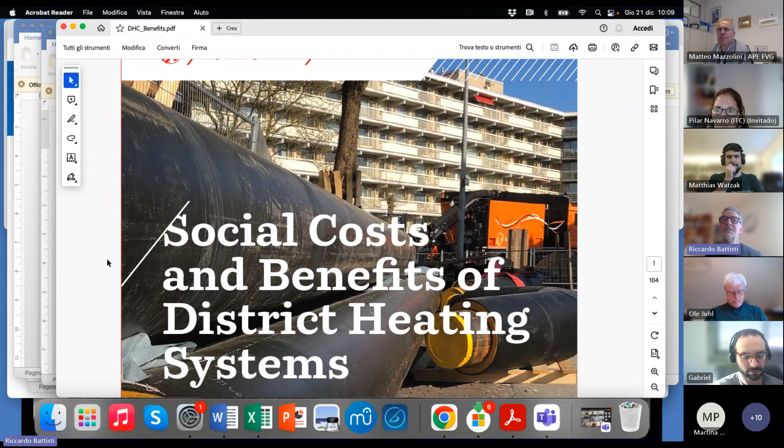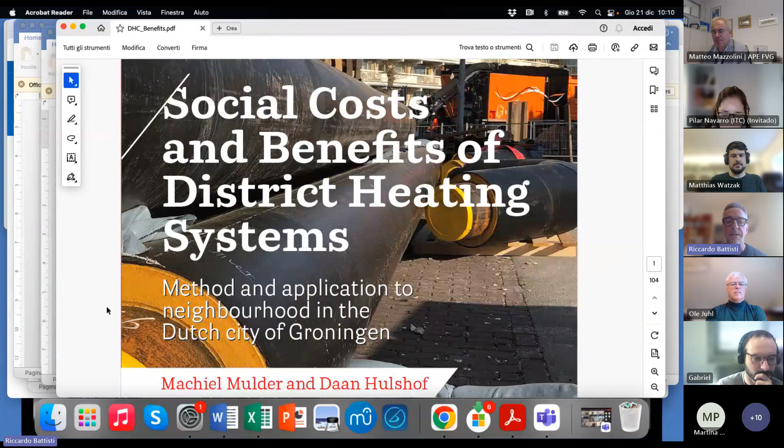Another interesting point is that this is from the Netherlands, where they have several district heating systems. We will hear from Ole especially about the experiences from Denmark, so I think this is very interesting - it can be complementary to what Ole will say. It's an application to the city of Groningen, where they installed a district heating system, basically with heat pumps. But we also present a general method on how to assess all of these elements.

So we just have a look at the table of contents, just to give you an overview. As you see, here they have different scenarios to assess the social cost-benefit analysis of this district heating system in particular, and more in general with the methodology. So of course, they define different scenarios of possible implementation of the district heating system, and then you have the different economic effects.

So first of all, of course, on the users, so on the households, then more in general for the whole district heating system. Then, as I was saying before, there is also an estimation of the indirect economic effects - for example, what is happening on the electricity network because of the introduction of this district heating system. Same for gas production and transport, or for other infrastructure.

And then, of course, this is maybe the most interesting chapter for our topic today - the external effects, so the external costs, let's say. So what are the environmental effects and what is their cost? Once again, everything is quantified in this study.

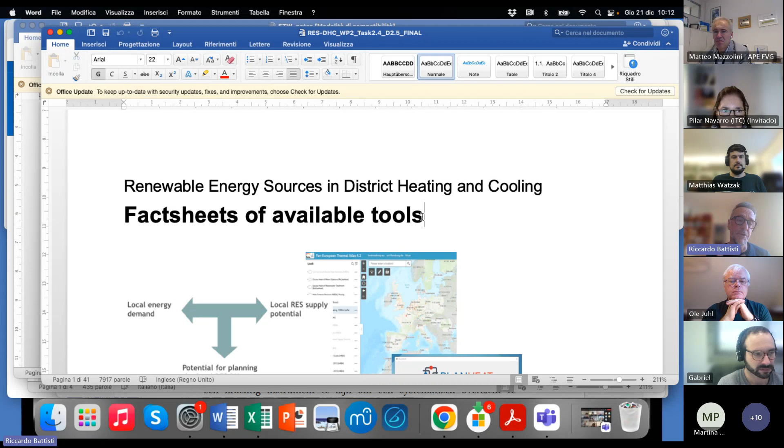Another thing I wanted to show you is something we developed within another European project on renewable district heating, called RES-DHC. We developed within this project a collection of fact sheets of available tools for estimating, for example, the potential of renewable district heating. Within this document, with the fact sheets of available tools, I want to show you here - you have a list of tools. We collected 15 different tools, which are all free tools, so these are not tools for purchase.

But then in the end, one of the appendices of this document is how to evaluate RES-DHC policies. And why I want to show you this is because here we tried to - it's the start of the work, not 100% detailed, but we tried really to start developing a comprehensive methodology to assess the benefits of developing, for example, district heating in a community. So we explain why you have to measure the results of your policy, and you can have a look and a read at the whole methodology.

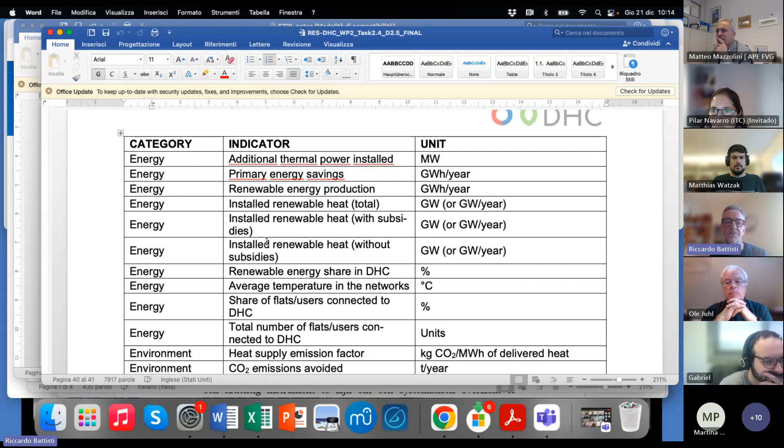You see that we define different steps, but what I wanted to highlight today is step 3 - which are the indicators you use to assess the benefits of the district heating, because this is today's topic for our train the trainers. So we started to develop a list of potential indicators here. You see that we have several possible indicators on the energy benefits of installing district heating systems, a series of indicators regarding the environment, and also about the economic and social effects on the community.

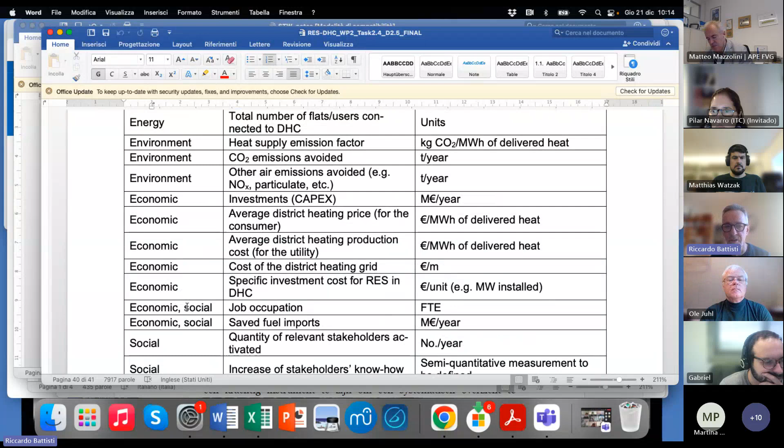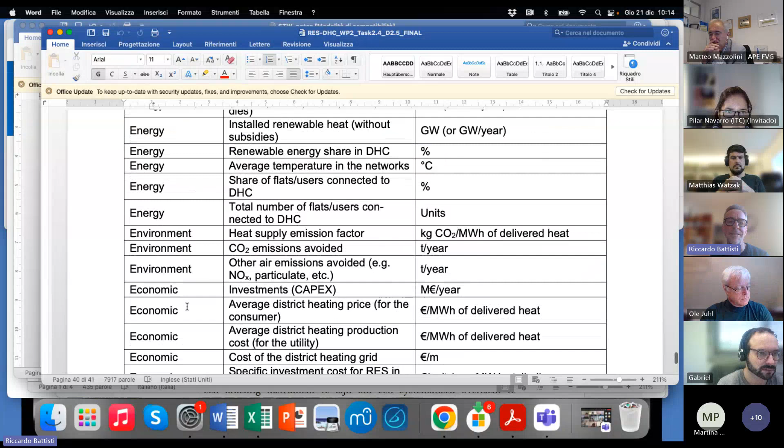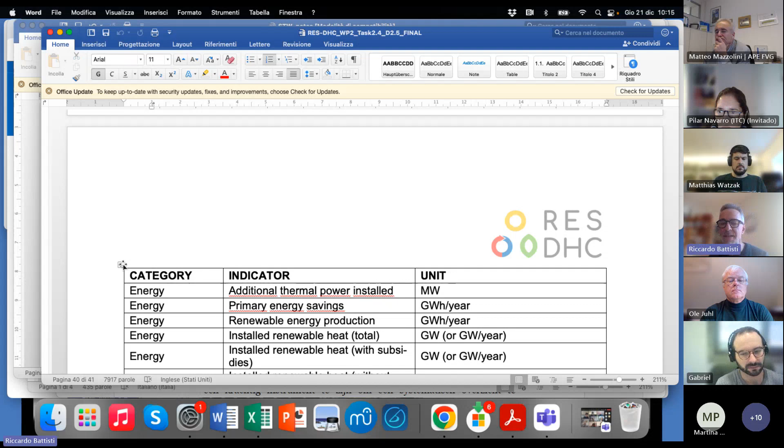So I think it could be also very interesting to have a look at these indicators, because this is not meant to be a list of mandatory indicators. It's not that each case should use all of these indicators to evaluate the benefits of a district heating community or a heating community. But here you can pick some of the indicators which fit best with your case. So I think this is also very interesting.

And I would close here, and I will send you these two documents, because I think this can be an inspiration also for your work on the pilot cases. Thanks.

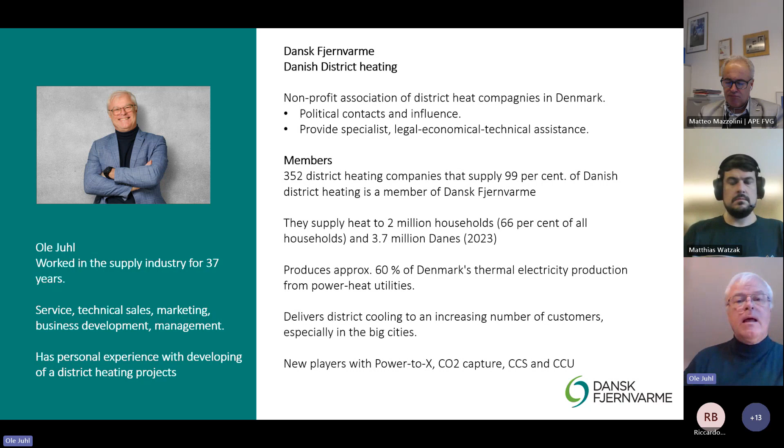In Denmark, the status is we have a little bit more than 3 million households. 2 million households use district heating. The rest are using natural gas, oil, electricity, wooden pellets, heat pumps, that kind of energy supply that we are moving away from, especially fossil fuels like gas and oil, but also the biomass from wooden pellets we are moving away from. But we have a transition period for the biomass because it's a very big change for many companies that have to change into perhaps electricity, heat pumps, or something like that.

In Denmark, as I said, there are close to 400 district heating plants, and the main part of them are cooperative, non-profit organizations. I think in Denmark we only have 40 that are not cooperative. They are owned by the municipality. It's not allowed in Denmark to own it as a private company. You're not allowed to earn money or own a district heating company. It's all about non-profits. I'll come back a little later to why that is.

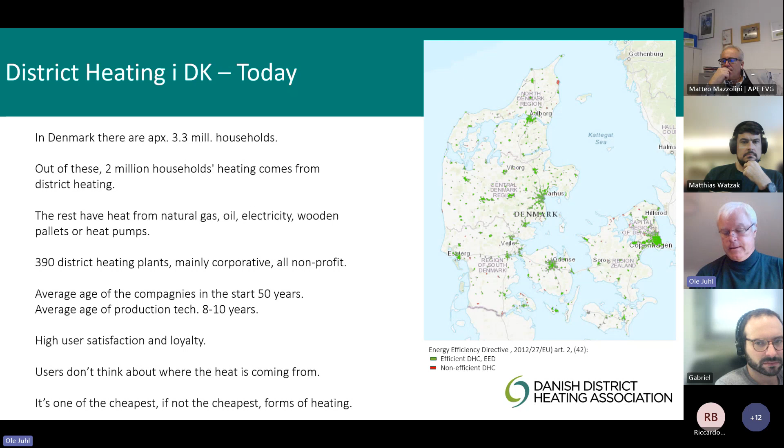So it's actually having a lot of place in our heart and in our society. There's nothing that comes from itself, and the background for this is that the precondition before the 70s was that we had an energy crisis that hit very hard. Those of us who are old enough can remember when the gas prices increased, here in Denmark we had days without driving, it was not allowed to drive your car. You had to walk. It was Saturdays, so we enjoyed it very much actually. And many people saw it as an opportunity to get a walk on the highway because it was dangerous to do before that.

But before that, we in Denmark have a strong cooperative movement. We have had cooperative ownership of the water sector since the middle of the 19th century. Agriculture sector also for many years, it was actually farmers in Denmark who got the idea about going together and building a dairy. And that has been a part of our way of thinking here up north. Electricity close to the year 1900, where we started making a cooperative electricity supply. And the first district heating company in Denmark opened in 1903, more than 100 years ago.

And also the movement includes football, we won the Euros in '92. So we like to do things together, and we think when we go together, we are very strong at it. It's easier to lift something when you are many people instead of one.

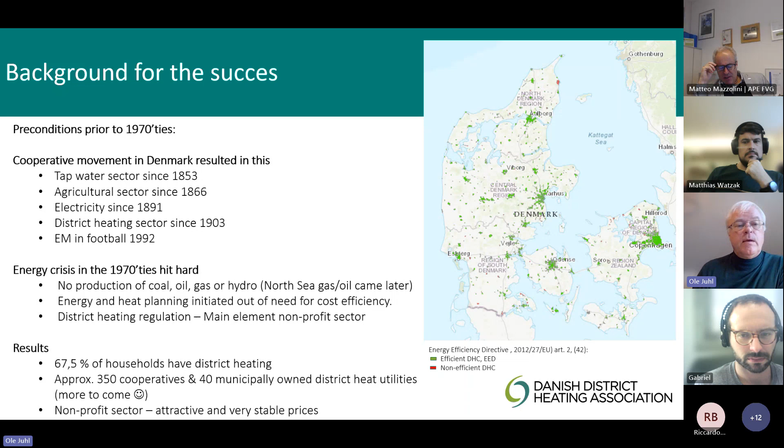Putting a little numbers and a few years to the history: in the 60s, growth on private and municipality initiative. In the 70s, we decided there should be a kind of legislation about it, a regulation saying how to do it. And also we thought we should have the first ideas about surplus heat, how should we use waste heat, so to say. At that time, we had a large production of electricity from plants in Denmark using cooling water just pumped into the sea.

And we could see there was no ice close to those electricity units and plants, and the fish were also much bigger there. So we actually decided this heat could be used for something, and we used it for district heating. In the end of the 70s, beginning of the 80s, we got the first regulation, we got the law, we got the planning from government, we got the planning from the authorities, and we started building up the networks, expanding the existing network, so they were not just in the big cities and the main cities, but also in many smaller villages, going down to 70 households as the smallest I have heard about.

When we came up to more present time in the 90s and the 2000s, we also saw that we could use much more different kinds of energy sources. Biomass, and we had natural gas coming up in the 90s. We were actually seeing that oil was a limited resource here in Denmark, so we shouldn't use it for making electricity or district heating. But we got a lot of gas, we got a lot of biomass, we could use that for something.

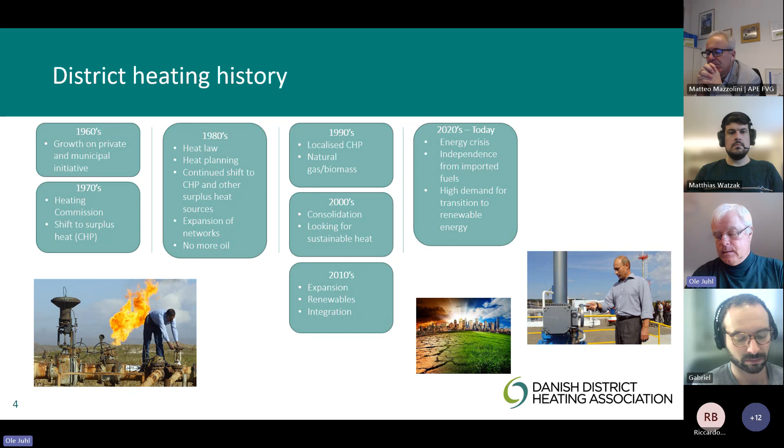Moving up to now, the 2020s, the energy crisis hit again. And when we have a crisis as humans, we also get creative and start thinking, how should we move away from imported fuels? How should we move away from fossil fuels? And how should we look into collecting carbon dioxide? That's the way we're looking at it now, saying how can we increase that movement that moves us away from the things that are environmentally and climate challenging, making the world a more green place to live. That is where we are now.

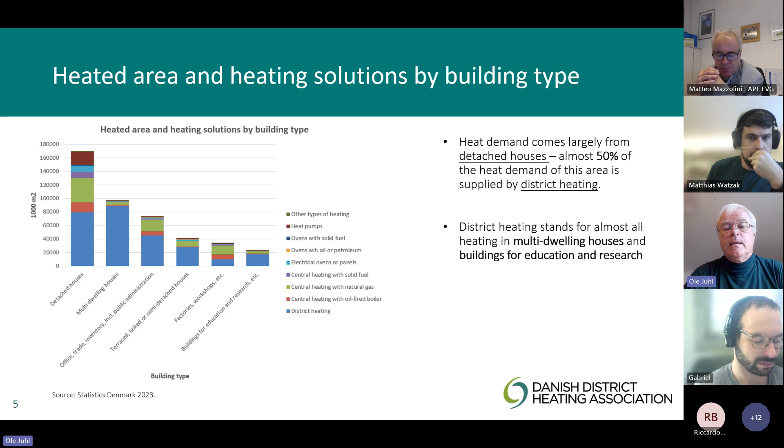And because we have here in Denmark a lot of detached houses, most of the heat demand comes from detached houses. But also we see that multi-dwelling houses and housing associations are very into getting district heating because it lifts some technical issues for them and provides them with very stable energy again.

We will lower our amount of natural gas and coal, taking it away where we like, but we are realistic in saying we will still need some natural gas for special productions that are very demanding, and also use it a little in some special areas that need it, as a backup heat supply. Solar heat a little, coal taken away, biogas taking over a little because there is a way of taking more carbon dioxide out of the business here.

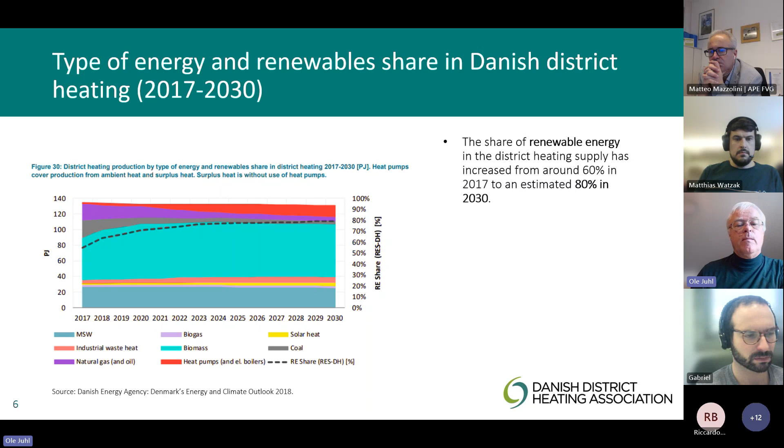So we are estimating that when we're coming around the 2030s, we will have a high level of renewable energy and probably will have moved away from burning anything to get heat.

The price is a very important thing for the consumers. Saying it's non-profit, yes, it is. There's nobody that earns money from providing people with district heating. But for the consumers, it's very important that the price is stable, but also attractive.

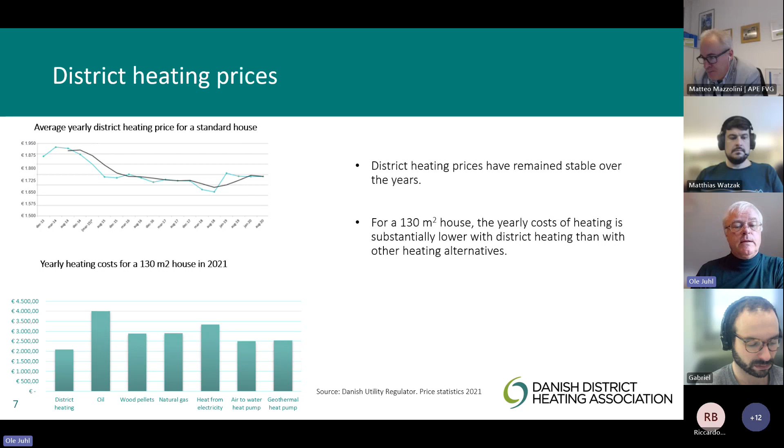But what is district heating basically? You know there's a lot of technology behind it—we have consumers, pipes, production plants. But in essence, district heating is actually a group of people going together and sharing the bill.

A lot of people go together and have a regulation that agrees to do so, and we just share the bill. It's the largest and second oldest sharing economy. Sharing economy in many things is a new invention, but in district heating we made it available in the beginning of the last century, so we share the bill.

We also have a high adaptability, a flexible production of heat. When the ball game changes, like now with natural gas and electricity going very high in the bill, we can change our heat production to something else, something cheaper or easier to get hold on. There's also supply security in the supply chain to consider.

When electricity production goes down, or as we saw earlier with wood chips when we couldn't get access to them, we can just change production to something else. That's why people don't see any problems—we have centralized production making it easier to change things, giving a more stable economy.

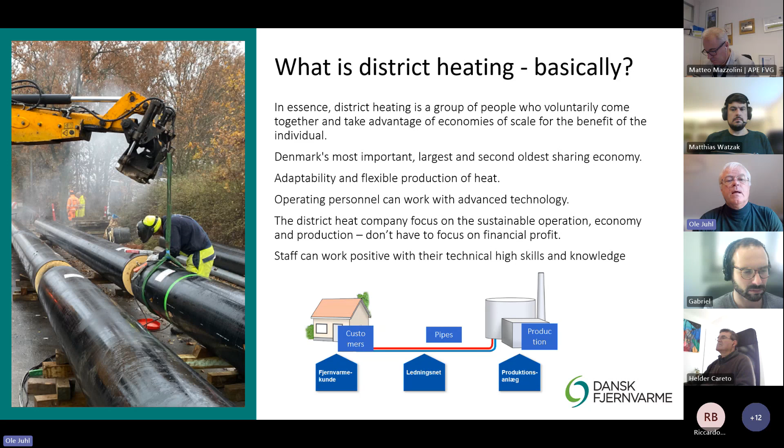District heating in our country is a kind of Swiss knife of energy—they have a lot of tools. They have the pipes, and the customers' technology is the same: a unit in the house, and pipes in the ground.

Updating there is not as high a need, because we are talking about a very long lifetime of the pipes, close to 70 or close to 100 years actually.

So all the development and the change are happening in the production areas. We have a lot of things to pull on: wood chip, heat pump, straw, waste heat, solar collectors, biogas, waste incineration, electricity boilers, natural gas, oil, coal, and geothermal. So we have a lot of different kinds of energy sources. The benefit is it's very easy to switch to a cheap or accessible energy and a more efficient technology. It's much easier to change the whole thing at one place instead of going to many households to make it more efficient.

That's also why it's very easy for us here in Denmark to look into the green transition, because we don't have to go to 2 million households to change from natural gas, coal, or oil. We just have to go to 400 plants to change for 2 million people, households. So that's some benefits - very efficient.

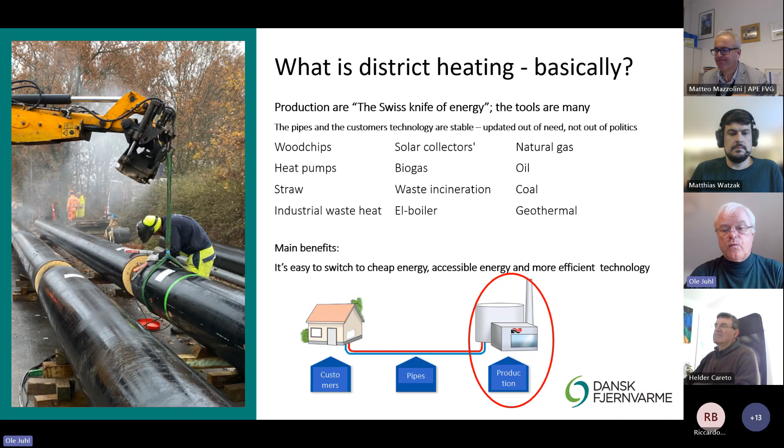Finally, the customers, who are also the owners - the drivers for them, and what do they get from it?

The users say they've got the most stable heating bill for many years to come. They're actually saying, when I build a house and I have chosen my district heating, I don't have to worry about changing the price level. It's very stable for many years, and it's very easy for me to make a budget for my private economy.

You have only a small unit indoors, not something as big as a 200-liter freezer or cooler. You have a small unit, 50 by 60 centimeters, that just prepares the hot water for you, and you have more space in your utility room or workshop, wherever you installed it.

It gets a lot of people to share the bill with. So if they are in need of a new pump or a new burner or whatsoever, you are not one person who should buy your own. There's a lot of people buying one together, and that makes it cheaper for everybody individually.

You become more independent of major political influence and conflicts, because if the politicians change something, we have a way to react to it. If they want to increase the taxes on biomass, then we can just move away from biomass and look into perhaps geothermal or other things that are very difficult to tax, because if you use geothermal there's no pollution, there's nothing to tax. It's very difficult for the politicians to do that.

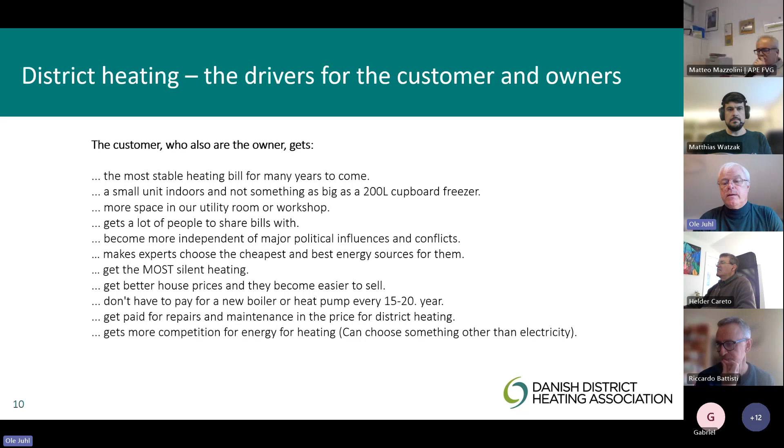Even though we have legislation and it's a non-profit area, we see more competition for energy heating. Instead of just having electricity or just having gas, we now have district heating and electricity in the area, so we can always change into something else. If I feel district heating is getting unattractive, I can change to electricity if I like, and the other way around.

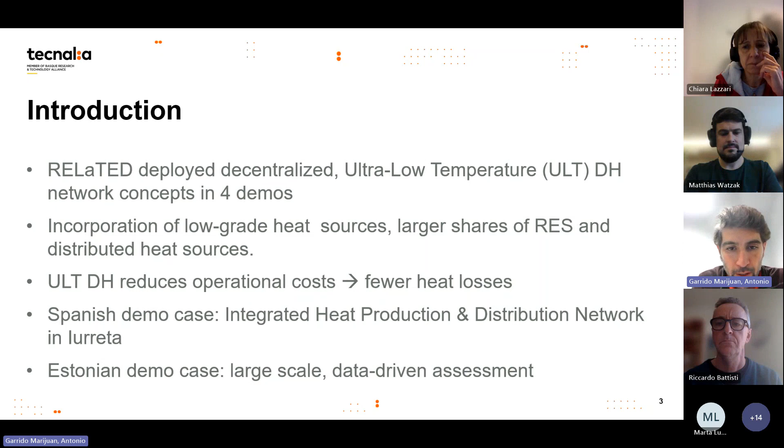There are two demo cases I want to present. The one in Spain was at the police complex, with 12 buildings attached to this district heating, so it's a small scale district heating, but it was really interesting because it was a mixed configuration.

It has dormitories, it has office facilities, gyms, and swimming pools. This means a lot of heat loads 24/7 around the year, because they never stop the operation as they are the police.

This was served by 2 boilers delivering heating and domestic hot water at the complex at 80 degrees. 80 degrees is a normal temperature for this kind of networks, but we tried to work at 35, in parallel to the pre-existing conventional district heating network. We worked at 35 of distribution.

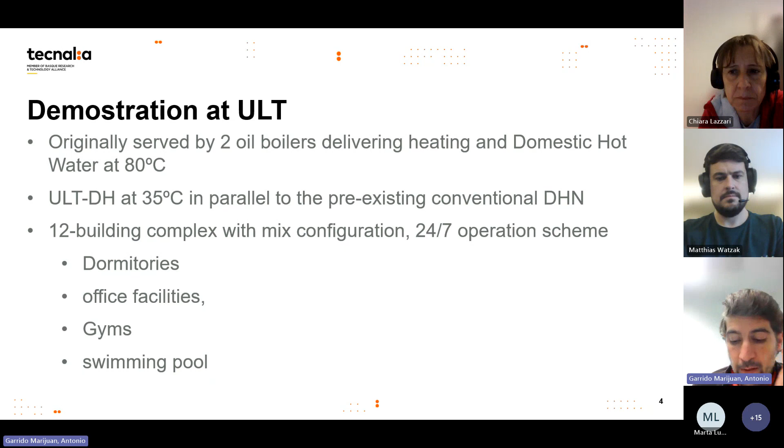This does not mean that we worked at 35 within the buildings, because they had all radiators, but we had some locally deployed heat pumps that were connected to the district heating. So this was really interesting.

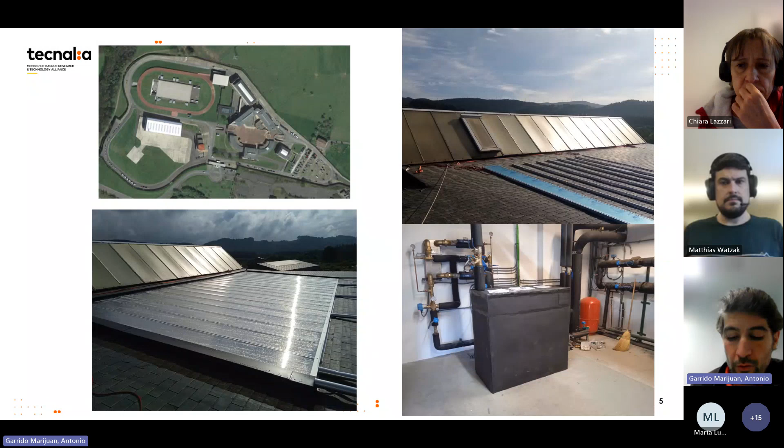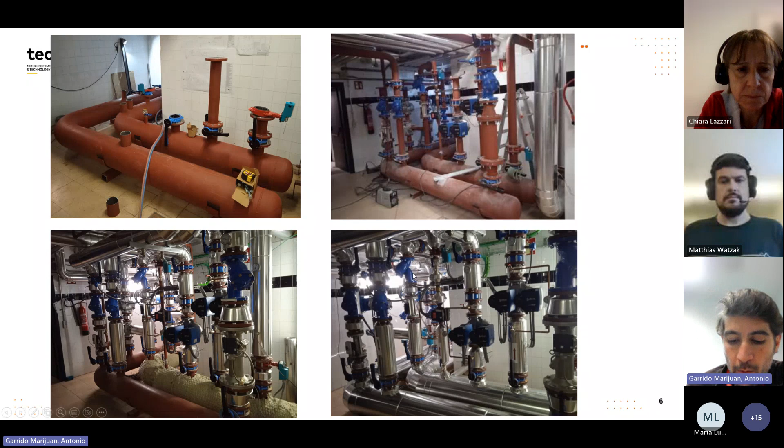I like to show these pictures because they show how we start with the collectors from the beginning, how later we start putting the distribution systems, and later on how we finish the works.

One thing I mentioned is that when you work at low temperatures, the benefit is that you work at high efficiencies. This is true for the solar thermal system, but also for the heat pumps. So if you work at an outdoor temperature of minus 15, you will be working at around a COP of 2. But if you work at higher temperatures like 15, you will be working at almost more than double the coefficient of performance, which is what you want. That's why we put these heat pumps working against the district heating instead of outdoor temperature.

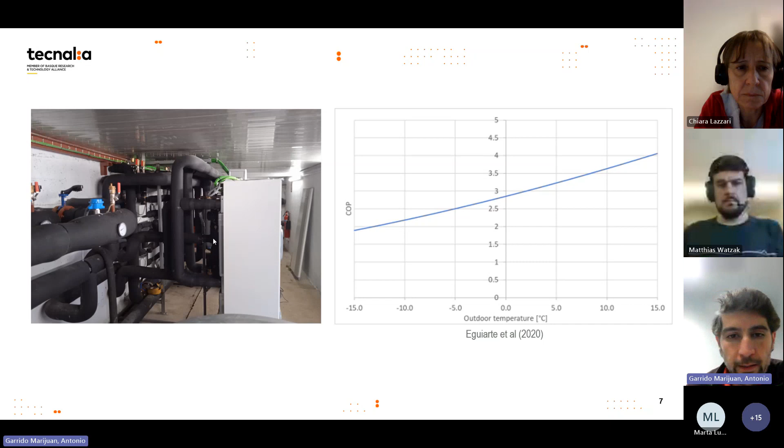Okay, also we include preheating of the domestic hot water, and also the swimming pool.

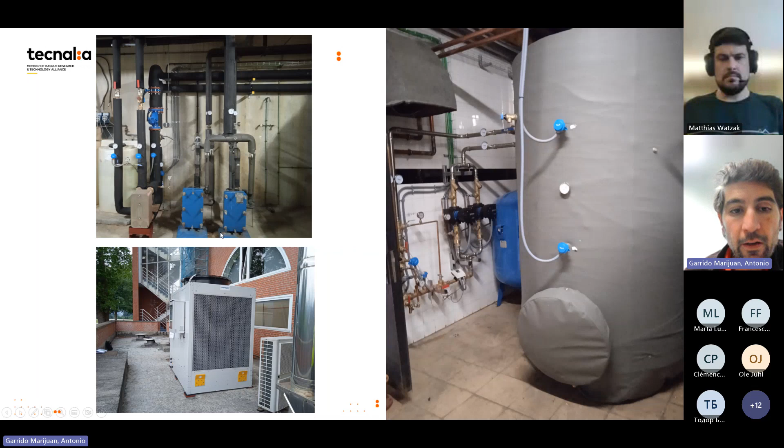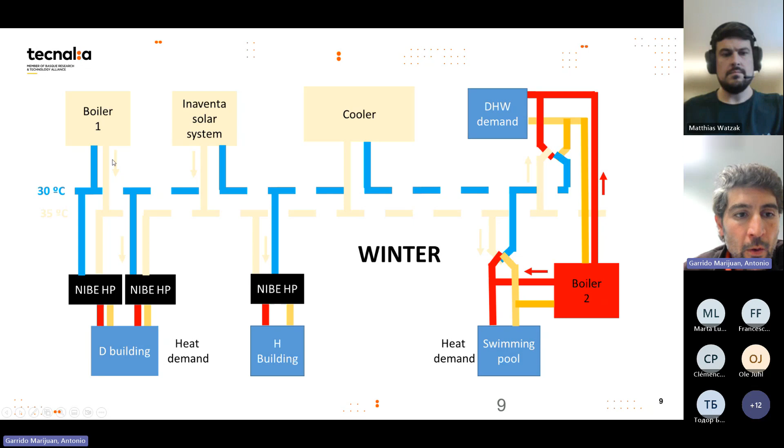We use it as a sink of heat in case we have a lot of production. The final scheme we have in Spain is this one. It was a district heating distribution at 35 and returning at 30, where we had attached the old boilers, but now they work. This one was working at 80, but the new one was working at 35.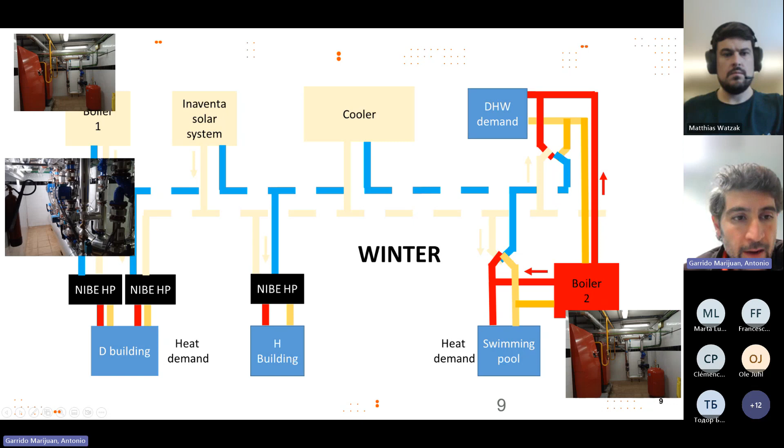This meant an important increase of efficiency. There was also, in parallel, the old system working at 80 because some of the buildings we could not prepare for the low temperature distribution. This is the manifolds that we include, the solar system, the distributed heat pumps, the domestic hot water demand. We cover also the swimming pool and the cooler.

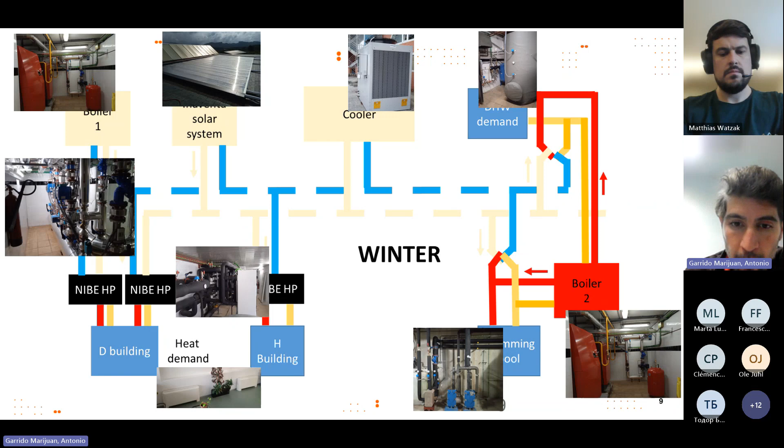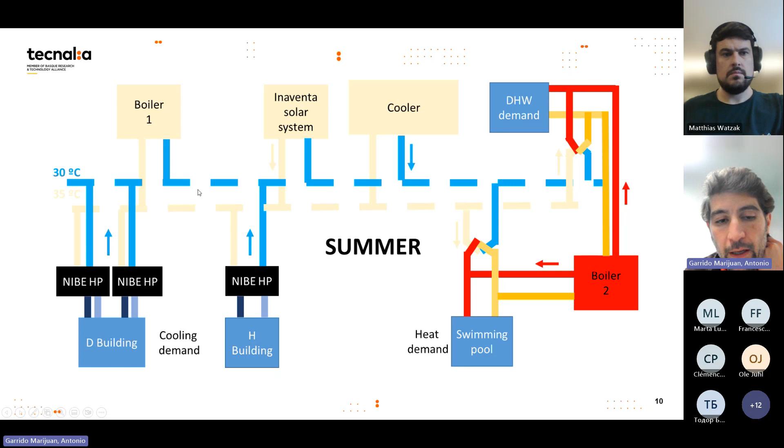The important thing about the heat pumps is that they would work at the heating season. So let's say in Spain that would be from October to March, but also in the summer season they were reversible. So when we had summer, we had also the heat pumps working, and with the heat rejection from the heat pumps, we will feed the district heating networks to prepare district heating, domestic hot water, and also for the swimming pool, because this is summer, so we don't need this for the heating of the buildings.

The lessons learned was that most of the plants that exist today are oversized. So, for example, in the case of the Spanish demo case, one of the boilers was not working at all during the year. Maybe it was working for 20 hours during the heating season. This is nothing, because they always wanted to have a backup.

Okay, you can have a backup of 20% of your peak demand, but this is double. This is at least 80-90% oversized. That means that you are working really inefficiently. You're working far below your nominal point, and you're working in suboptimal conditions.

Therefore, retrofitting projects on existing district heating networks have high improvement potential because they work so far away from their optimal point that there is a lot of room for energy savings. The implementation of heat pumps working in reversible modes really increased efficiency because they show better performance in both heating and cooling when compared to normal heat pumps. This is also very important.

The integration of building-integrated solar thermal systems decreases the carbon footprint of existing district heating networks. This means that every time you put waste heat or renewable energies into a district heating network, you would reduce the carbon footprint significantly. And also, this was a success case study because the police, let's say the branch of the government that runs the police, were really happy, and they were going to foster this in other public buildings.

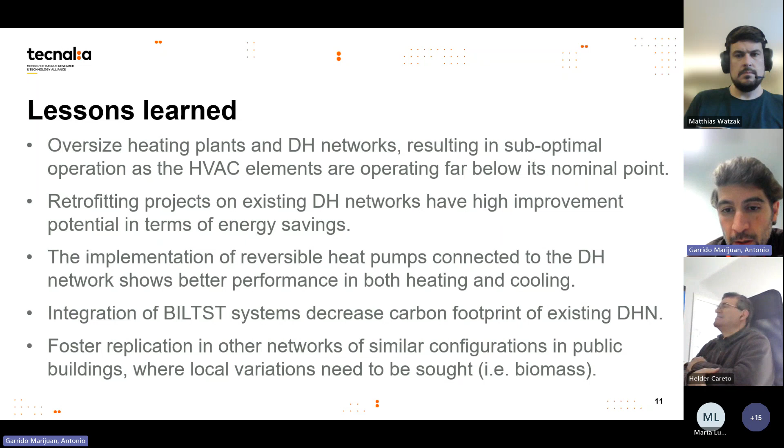This was one of the demo cases, and now one of the questions is, okay, you're working at a lower temperature, you're working even at 35 degrees. Most of the systems you have inside the buildings will not work at this temperature. I'm talking about conventional radiators, even fan coils. Radiant floors can work at 35, but you are in the middle.

So you need to really deploy a way to assess that the community well-being is kept stable. You fight against Legionella, you fight against thermal comfort being below your threshold.

What do you do? Well, nowadays everything is about data, so you collect data and you analyze this data. In the figure, we are looking at how district heating works. When there is a warm period, when you are above 5 degrees, you will work at a distribution temperature of 75.

Of course, when you go down to -20, and I can assure you that in Estonia you are at -20 for some weeks of the month, you must go to distribution temperatures of 100. On the return line, you will be getting these temperatures. You need to assess that you are getting these temperatures on distribution, because if you are not, then the people in the buildings are not getting what they have paid for.

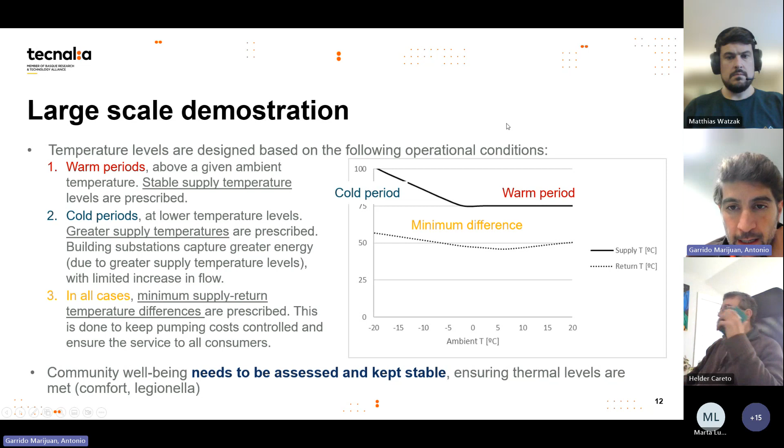So what we did in Tartu is reduce the temperature of operation and assess that we were getting what we promised. This is the scheme of the district heating network we work with. This is only a small part of the complete network they have in Tartu.

When you reduce temperature in the district heating, you want to go step by step. The district heating network operates between 75, 45, and 110 and 60 degrees, delivering a huge amount of energy every year to more than 1,500 consumers. The network is increasing because of the importance of district heating in these countries. So this was quite a challenge.

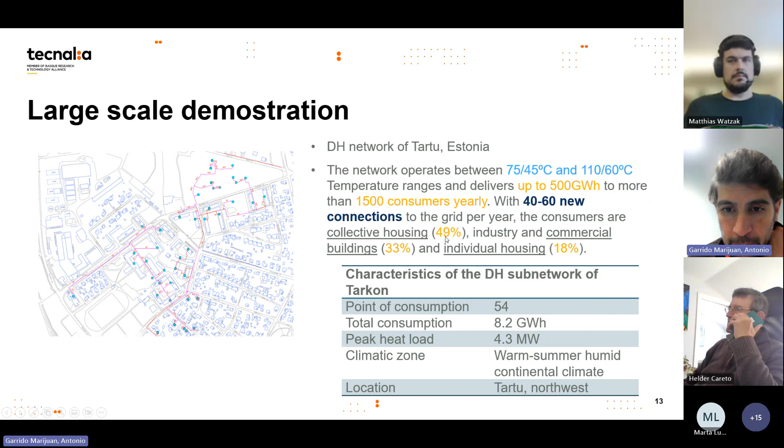There are more than 1,500 consumers connected, but we only connect to 54 substations, to start with a small demo case. We had connected smart meters to different parts of the district heating network, before and after the substations for both domestic hot water and space heating, and also in the distribution.

This is something we're going to see more each day, because in the last decade we have seen great progress in the deployment of smart heat meters. They are cheaper, it's cheaper also to store the data, and we have better data analysis tools - artificial intelligence, but also other techniques that don't imply machine learning. So this is how we're going to analyze the operational excellence of networks.

When we lower the temperature of our network, we must ensure that all the substations are working in optimal conditions. So we equip the network with heat meters in all building substations. There were 54 substations, and all of them have at least 5 sensors to analyze what was happening. The accuracy of the devices we put in was over 95%.

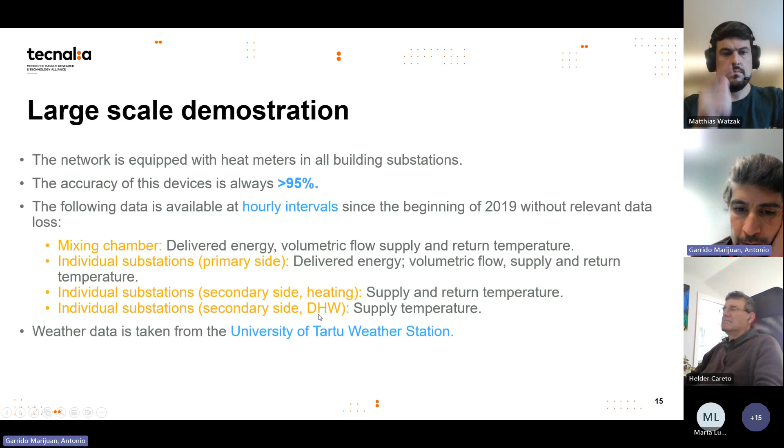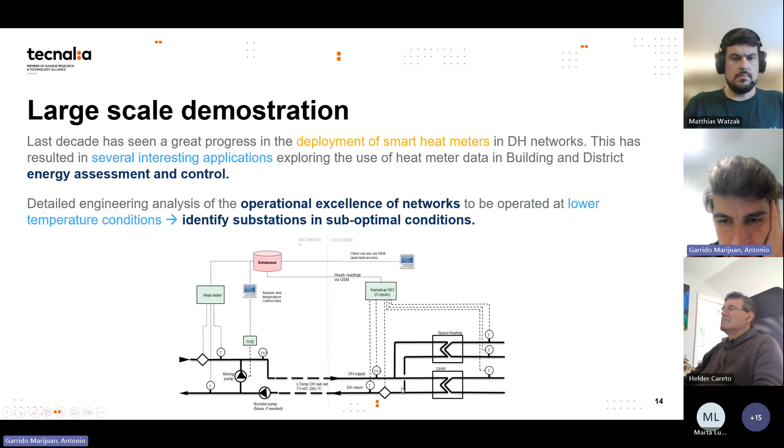We have data for the mixing chamber, for the individual substation on the primary side, from individual substations on the secondary side of the heating, and individual substations on the secondary side of the domestic hot water. So again, we have data on the primary side, on the secondary side, and on the distribution side.

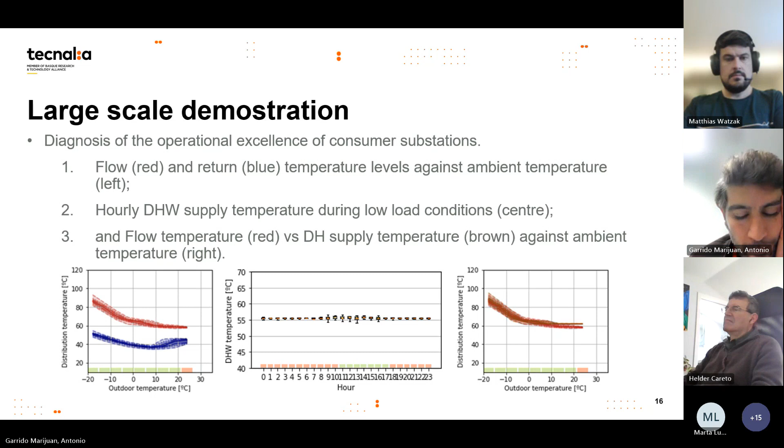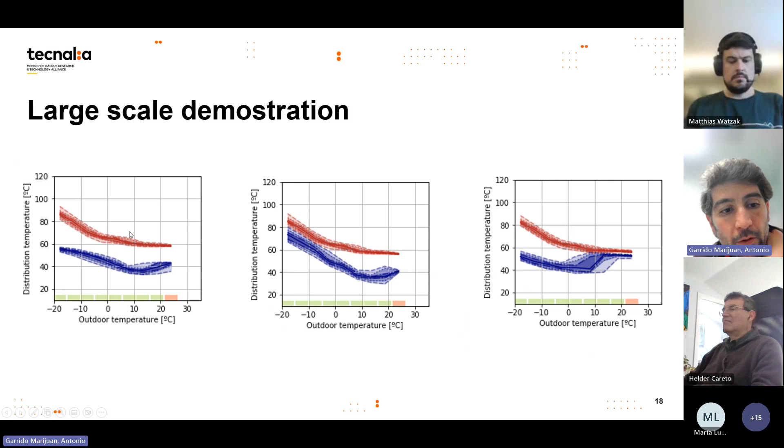So we were seeing weird things sometimes, and we could set an alarm: you are not working, you are not giving what you promised, you may have some problem with the domestic hot water. This is a very satisfying result because we were able to check 54 substations with really low effort. What we want to see is this, but sometimes you're not getting the same, so an alarm was set for every time you're not having the desired behavior.

Again, on the secondary side, you want to have small thermal gains - this is the supply and return on the secondary side, showing the thermal gains on the secondary side of heating. You don't want to see this, because then you are not working in optimal conditions - something is wrong with your substation.

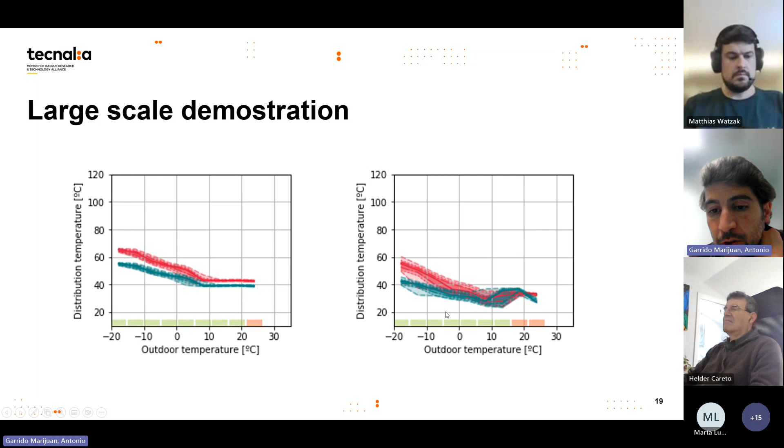For domestic hot water, this would be good behavior. This would be a behavior you don't desire in your substation, and therefore an alarm was set.

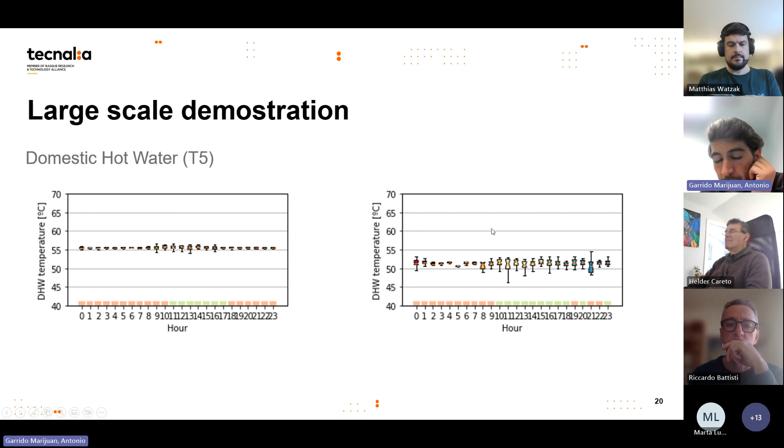You can see here that for every hour in the day, for the complete heating season, we were analyzing the domestic hot water. There will be low differences in one substation, but a big difference in the substation for the heating season.

The alarm was also capable of showing which substation had the problem, so you could say 'Põllu, Muru, Kummeli, you have a problem in that substation, check it.' Of course, the most problematic substations were those with high capacity, like this one, 132 kilowatts.

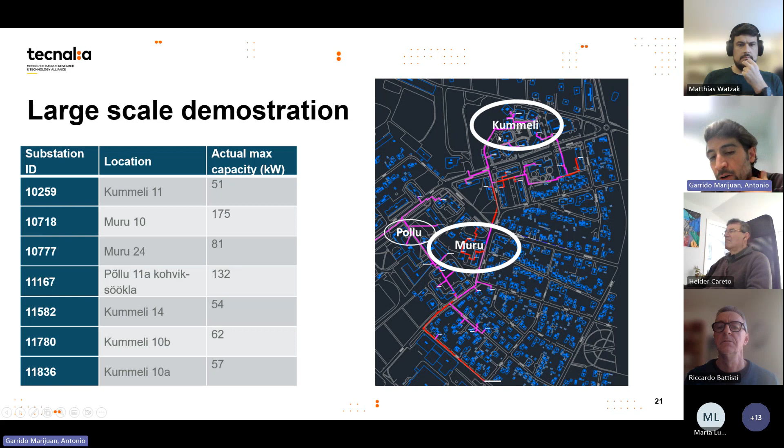That one had problems when you lower the temperature, but also the ones located at the end of the line. At the end of the line you have more thermal losses because you're going a longer distance, and this means more problems when reducing the temperature.

Conclusions: if you're going to work at low temperature in your district heating, data monitoring is an essential tool for optimization. In Tartu, it's funny because before the deployment of the sensors, they were working at high temperature. They never had problems because the temperature was so high that they always got the desired temperature at building level.

But they were also working in a reactive manner. They would only know about problems at the substations if the consumers called the central plant. So the alarm was that people were complaining, and this is a business, you don't want people to be unhappy. With data monitoring, you can anticipate the problem before somebody calls you, and they are happy.

It's really time consuming to analyze the data in a traditional way, but automation to improve district heating operation identifies issues in real time in a really easy and fast manner. I don't know if I have it here, but the creation of this graph for 54 substations took less than 10 minutes.

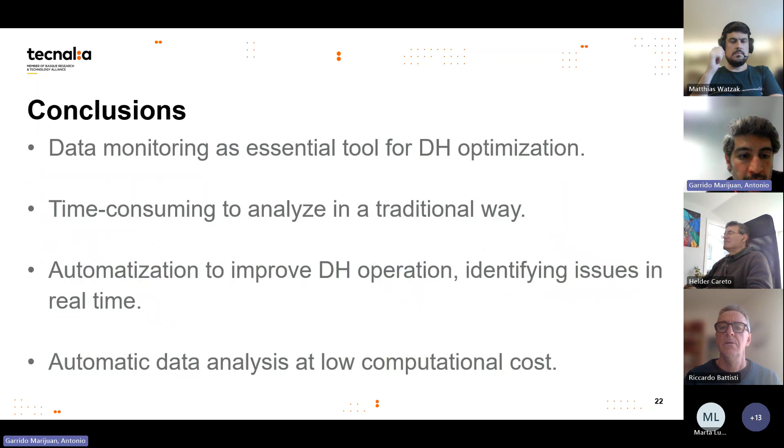Every half an hour we get new data, and we process all the data in 10 minutes or less. This means you know within 10 minutes what problem you have. So I think it's a very promising result.

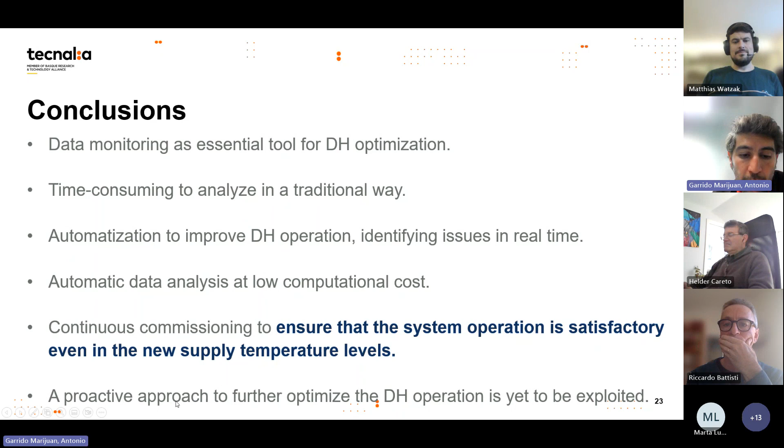This allows for continuous commissioning to ensure the system operation is satisfactory even at new supply temperature levels. If you know all the substations are working perfectly, then you can go lower with your temperature, and you can keep lowering it until you get problems at the substations. That's really helpful, and it also allows a proactive approach to further optimize district heating operation.

No major failure has been observed, meaning that lowering temperature is feasible. Substations identified through the screening process have been found to be operating very close to the threshold criteria. That's really good because you're saving money while working at the threshold criteria.

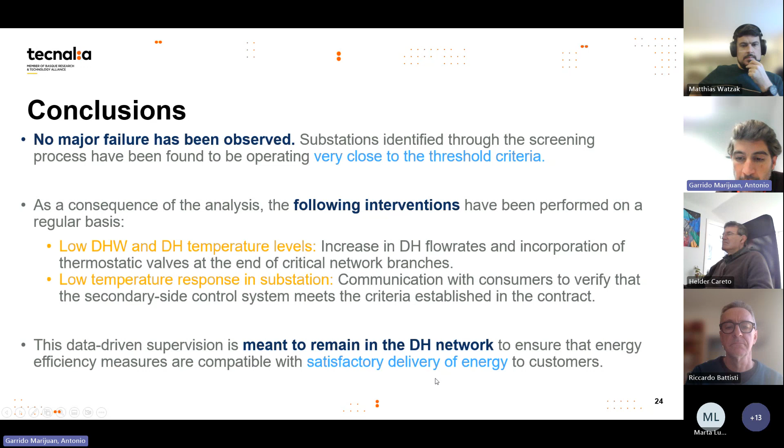As a consequence of the analysis, we reduced the temperature even more. The data-driven supervision is meant to remain in the district heating network after the project ends, to ensure energy efficiency measures are compatible with satisfactory delivery of energy to customers. This was what I wanted to present today.

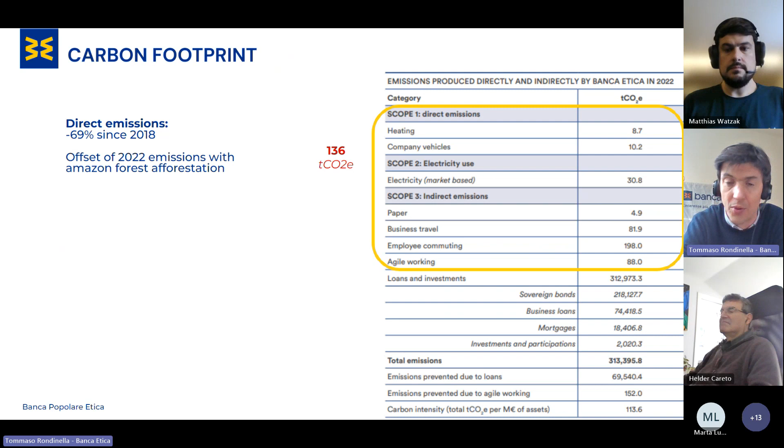Right now we are finalizing our SBTi standards for planning a decarbonization plan. For our direct emissions, since 2018 we have abated them by about 70%. That's a good result, but every bank is called to achieve this in a very short time - the European Banking Authority calls for this result in just 2 or 3 years, because the big issue is the indirect emissions.

As you can see, we have 136 tons of direct emissions, those deriving from our own activities, but the indirect emissions, related to our investments, are 3,000 times larger. So the real issue for the financial system is working on these indirect emissions.

How do we do this? Considering that we don't have the chance to move away from polluting activities, because we never financed fossil fuels, most banks can do this by divesting from fossil energy and moving to other sectors. We can't do this because we're not financing oil and gas. So we have a few other options, and the option is making our clients aware of the problems and helping them reduce their emissions.

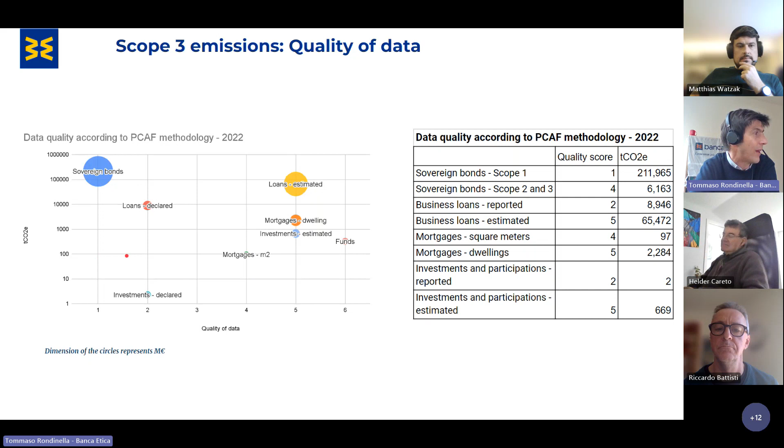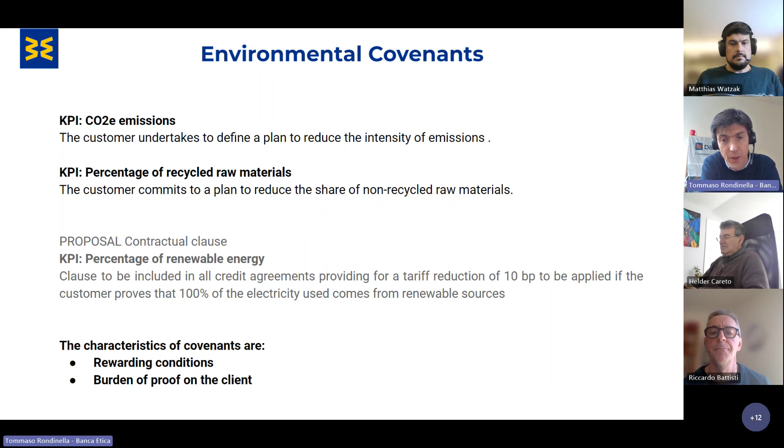Aside from this, we have built environmental covenants that improve conditions on interest rates for clients that respect certain environmental conditions. This can be a plan to reduce the intensity of emissions, or to reduce the share of non-recycled raw materials, or, coming in the near future, a discount for clients using only renewable energy. If a client has a decarbonization plan, for the time it respects that plan, we will offer a discount. All this is part of a general rationale for a decarbonization strategy.

We offer important discounts to access a decarbonization tool. We have an agreement with a company that accompanies clients in the measurement of emissions, and also in building a decarbonization plan for our client members.

This access is very facilitated: small and medium enterprises have free access to the calculation, and we also offer discounts on consultancy for building the decarbonization plan. Once they have the plan, they can also access our covenants. So we try to accompany all our clients toward a path of decarbonization, which will ultimately also allow the bank to respect its objectives and targets for decarbonization.